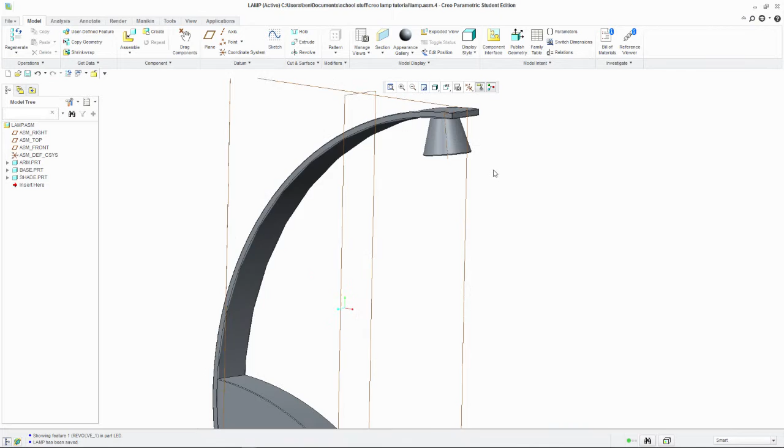Okay, so now I've rounded off all the edges on all the parts. The last thing, modelling wise, I need to do is create an insert which goes into here, which will hold the LED in place. So we're going to create a new part. I'm going to call it insert.

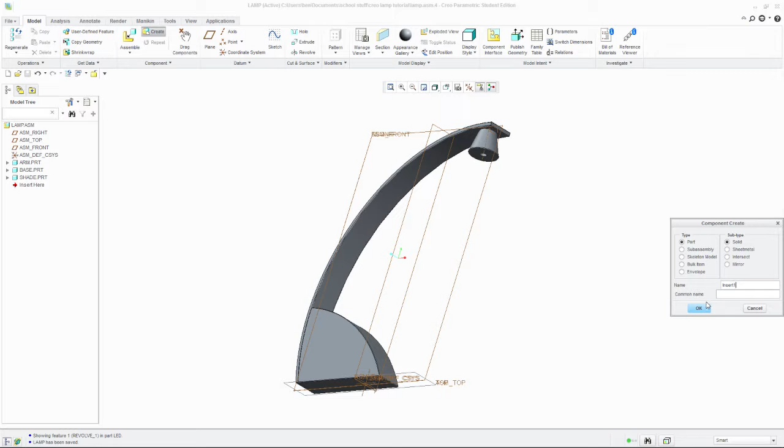Okay, I've already got one called insert in there, so insert one. Click OK. Create features is checked, and I'm going to use the extrude tool. So I'm going to click extrude, select this face on the bottom of my cone.

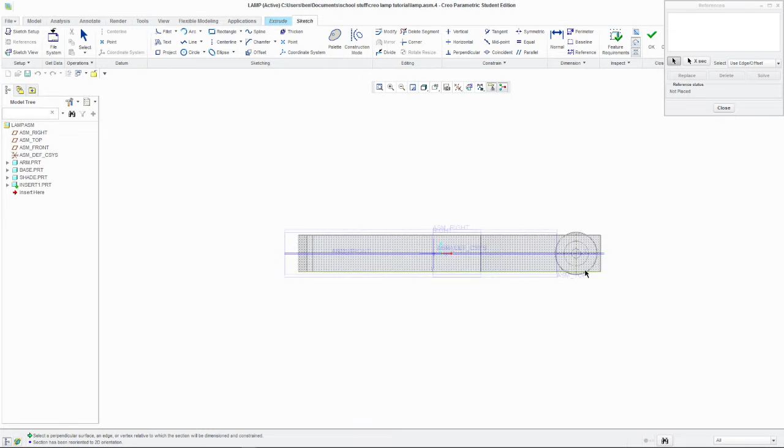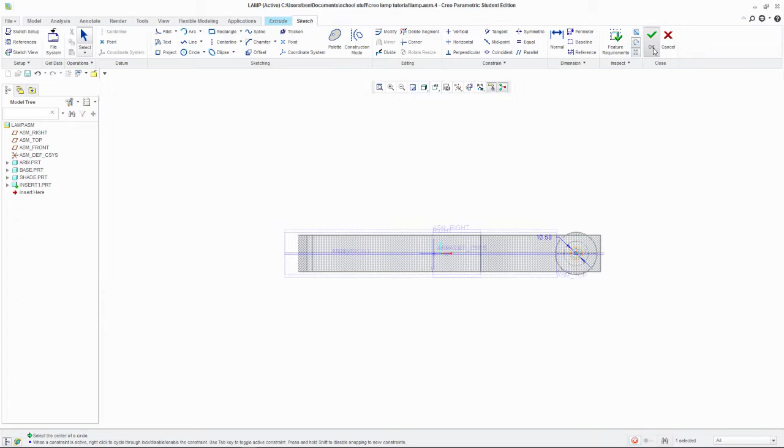Okay, and now I'm going to select sketch view, and I'm going to use this circle, the inside of that hole, as a reference. So now I'm going to draw a circle using the center point there, middle click, change the dimensions to 10.5, tick, hit OK, and extrude that by 1mm and tick.

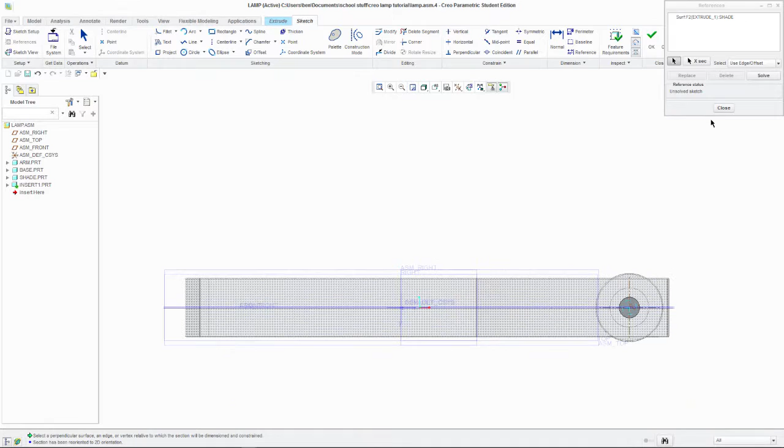Now what I want to do is extrude again onto that face, choose the inside of the hole again as a reference, sketch view, close that. This time I'm going to project this hole, so need to do both sides of it, middle click, tick, and the computer's going really slow now, don't know quite what's happened.

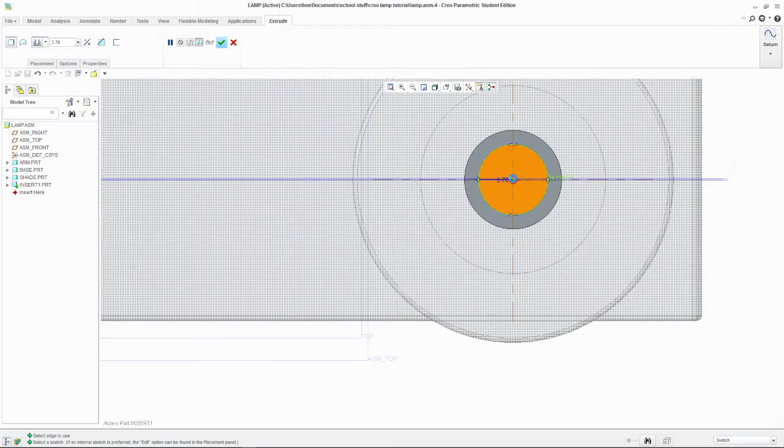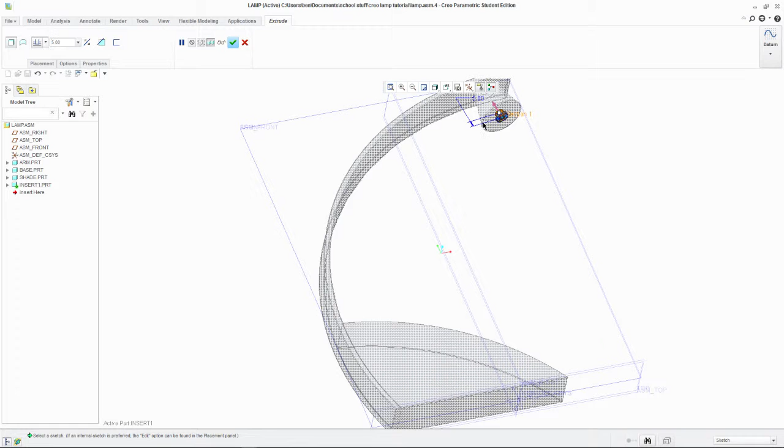Okay, so now, if I rotate that so I can see what's going on, refit it. Right, so what I want is this to go up into there. I don't want it to cut out at the moment, so I just need to uncheck that. So it's adding material still, and change that to 5, or I could have clicked on there, and tick.

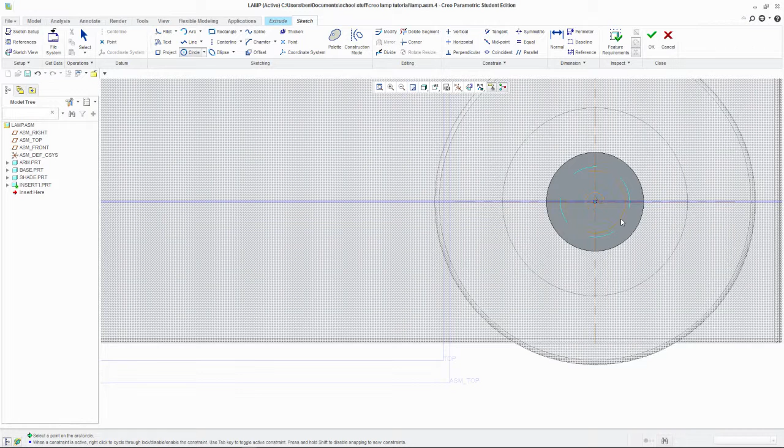Okay, and then zoom in, extrude again onto that surface, and that's my reference like before. Close, sketch view, zoom in, draw a circle, and this time I'm going to make the circle 6mm. Like that. Okay, and tick.

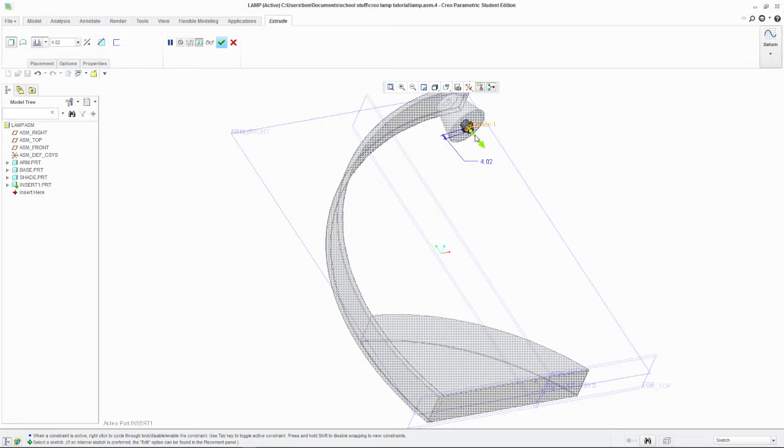And this time, right, I want it to go up and cut away, which it has, yeah? And then tick and zoom in, and you can see my insert there. So I'm just going to round off this edge here and this edge there, and then tick.

Okay, now I go back to here, assembly, activate, and create a new part. And this time it is going to be the LED. So call it LED, click OK. LED 1 will have to do, and create features is OK.

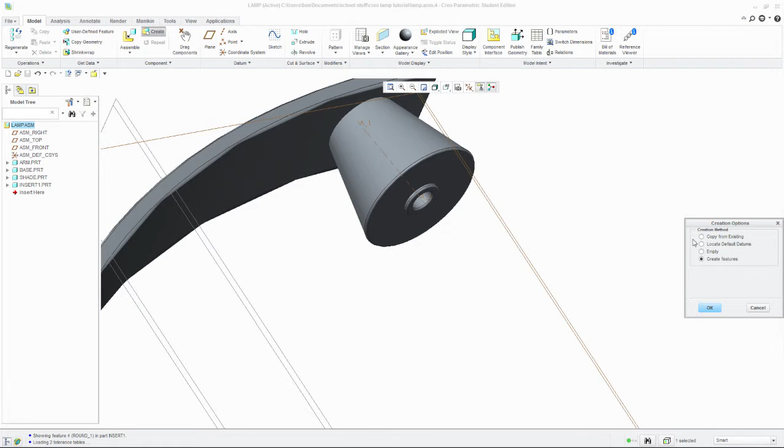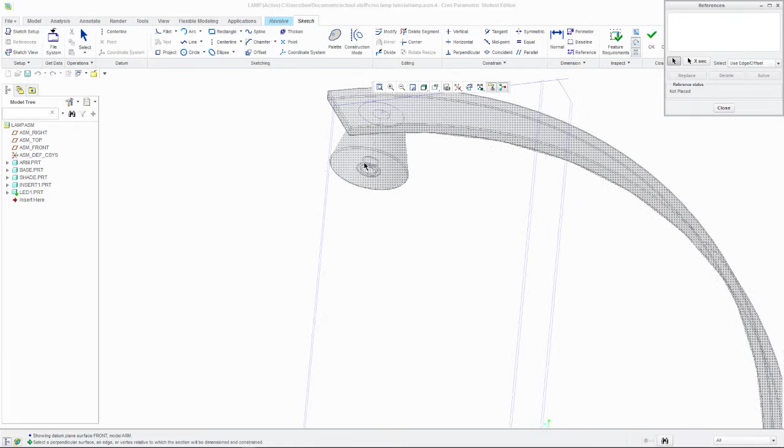And I'm going to use the same plane as I did before for my revolve. So I'm going to use the revolve, and use the same plane as before. So that plane there, the front plane, and I'm going to zoom in here, and as a reference I'm going to use the center line, which is here from last time.

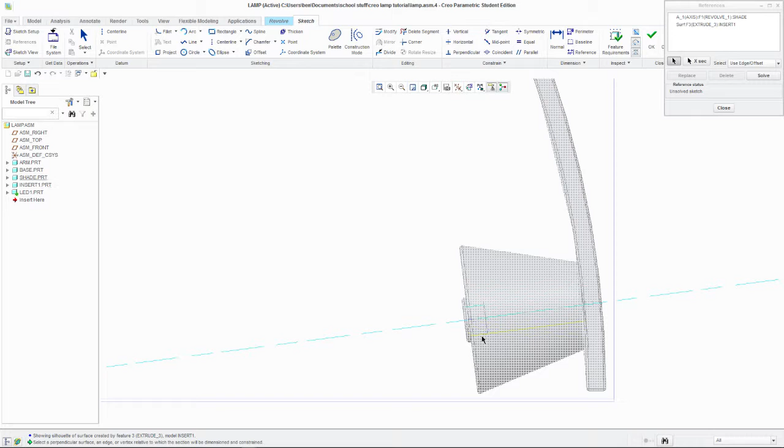So if I select that and then sketch view, it sometimes chucks it around to a different angle, which is weird. Right, if I hold down shift and the middle mouse button, I can just pan that, zoom in, and I want to select the inside line of that hole, which is there and there. You can see there's the line there which is the wrong one. I want the inside of the insert, yeah, so it's there.

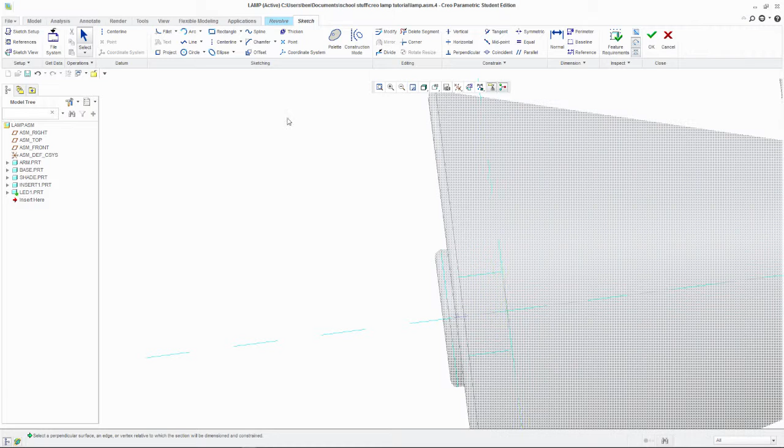Right, I want that line as well, and I also want I want that to go down to there, and I want this line as well. Okay, so now if I close that, so I did all of those, so I've got, when I draw a circle I can set it to there and to there. Yeah, if I hadn't have done that I wouldn't be able to snap to those points.

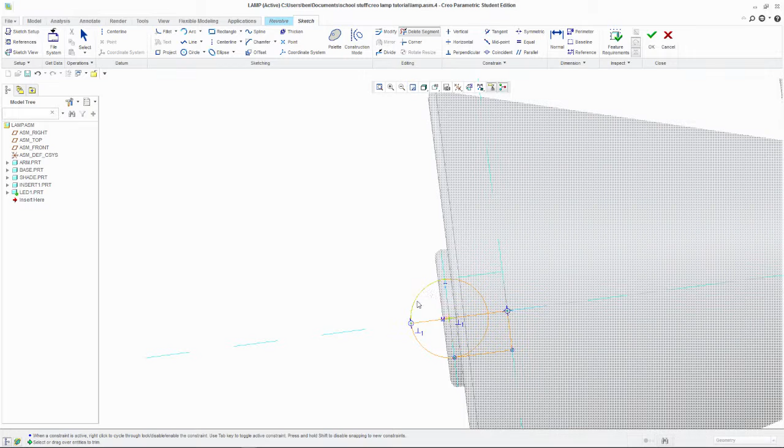Right, then I'm going to use the line tool, and I'm going to come up here to there, and then back down to there. Okay, and now I just need to delete some of these lines. So that line, that line, that line, middle click, and it goes yellow.

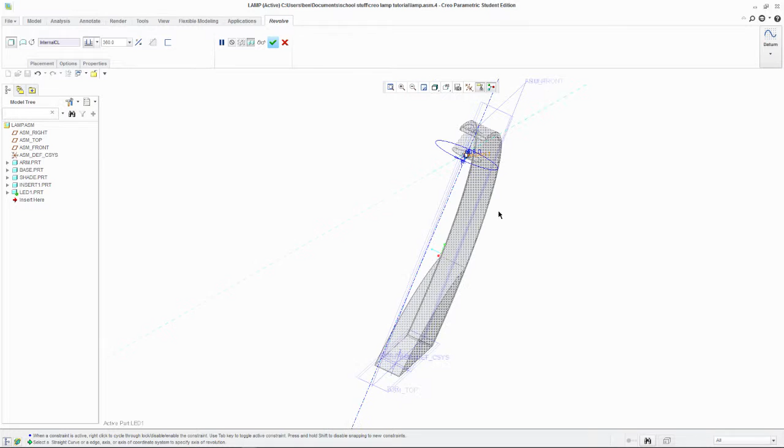I just haven't put in the center line yet, so select the center line and left click there, and then left click further up along that reference as well. Then I've got my center line, tick, and you can see my LED there, and tick.

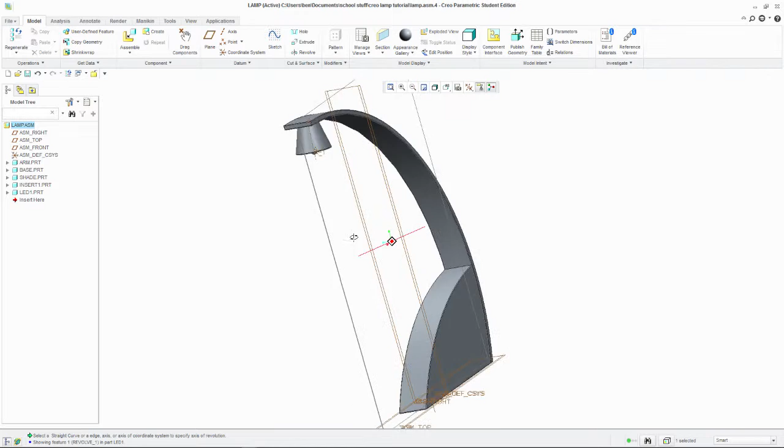Okay, so now if I go lamp assembly, activate, so now I have my lamp with all of the components created, and that's looking really good. And the next thing, the most exciting thing, is to render it, which I will show you in the next video. Before I do that, I'm just going to save it.